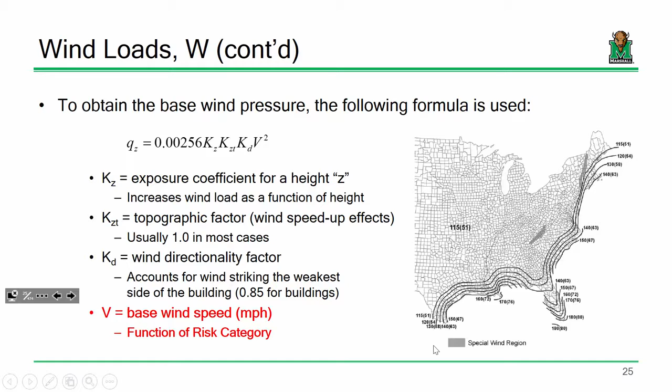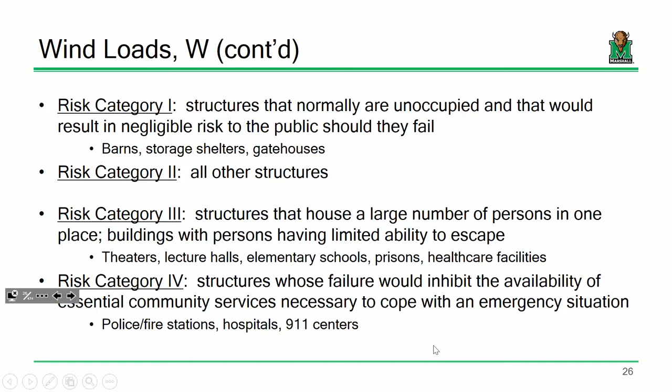We talked about risk categories. Risk categories affect seismic design as well, although we're going to kind of soften it a little bit. Just like wind, designing for earthquakes is going to be dependent on the type of structure you're designing. You're going to approach seismic design differently for a 911 call center than for, say, a barn or a grain silo, because it's all about risks. There's more potential danger with the failure of a 911 call center than there would be for some barn or something.

Now, Kz, like I said, that's the complicated one, that's the one we went through last time. I say it's complicated, but it really is pretty plug and chug, you just go through and calculate it out depending on the height of your structure. The idea is, if you have a really short structure less than 15 feet tall, we can just keep it simple and assume a constant wind pressure. For anything over 15 feet tall, that's where we need to start assessing wind speed or varying wind pressures as a function of building height.

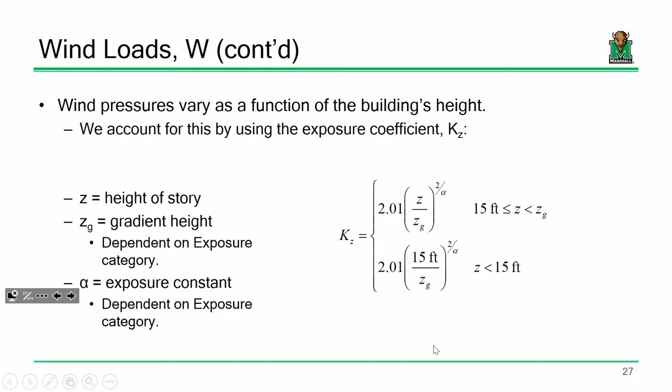And these equations are valid up until Z sub G, this gradient height, which is dependent upon the exposure category. But keep in mind that's pretty tall. Category B, that model would be valid up until a height of 1,200 feet, a pretty tall building. All right, does this sound good? Any questions? Yes?

That's when you start breaking out. That's a good question: what do you do if you're in excess of this? That's when you start doing things that are a whole heck of a lot more refined. It wouldn't be off the wall to do something like a wind tunnel test, build a scale model of the structure and actually put it in a wind tunnel and start recording the response.

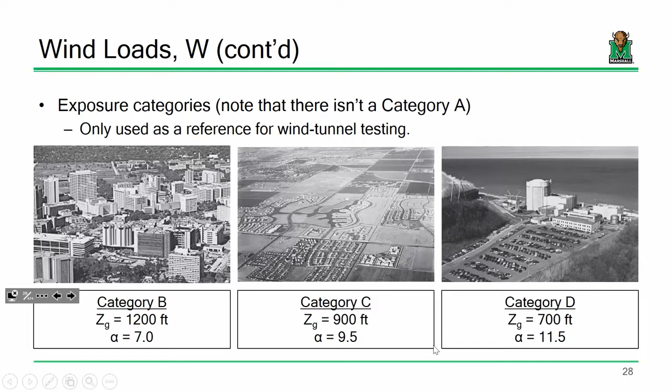That's pretty common for your really complicated structures. That's one way of going about it. Another way is to do some more refined computer modeling and things like that. Sound good? Okay.

So we went and did a pretty basic example to try and assess how you would compute base wind pressures at varying heights of the building. What you would then do with those pressures is similar to what we did in concrete design, regardless if you had it last year or 2 days ago: take that wind pressure and distribute it across the element's tributary area to determine what point load I need to put on my RISA model. We're going to do something somewhat similar today with seismic.

Last thing I did want to mention, we're not doing everything associated with wind here. There are some other issues, like handling gusts and internal positive and negative pressures in a building under wind. We talked last time, if you're in a building and it's really windy outside, you've experienced that event where you open the door and it has a tendency to either slam shut or stay open under heavy wind. That's because you can generate positive and negative internal pressures inside a building, and sometimes you need to take that into account when you assess the frame.

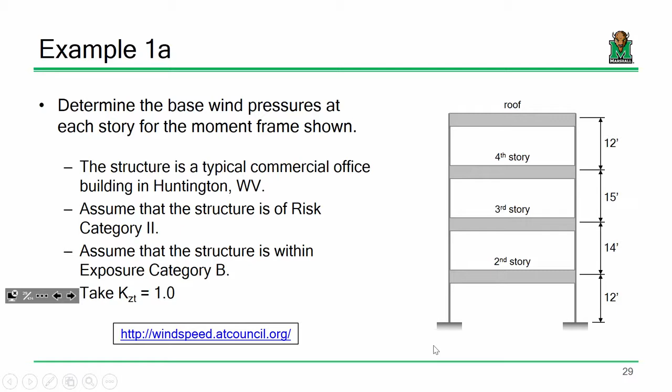Okay, so like I said, a couple other things. Again, the internal positive and negative pressures. Also, eccentricity.

More often than not, we engineers would like to deal with buildings that are nice and rectangular and symmetric and easy to analyze. But what if we have a building that's something like an L shape and we have wind attack it? Well, not only is that wind going to be applied to the frame, but it's probably going to want to take the building and twist it a little bit. So it's not very complicated to assess.

We can talk about it later when we go through some assignments, but the long and short of it is when you have a frame like that, usually you're going to take your wind and offset it some amount. So you'll have a larger wind pressure on this side of the building than on this side to account for accidental eccentricity and things like that. If you can handle base wind pressure, then it's really just more provisions and pretty straightforward stuff.

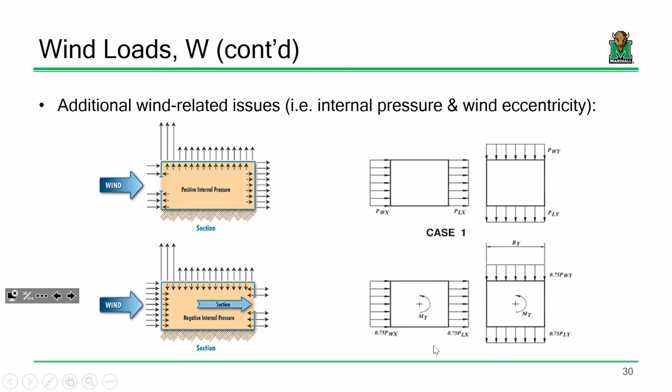All right, let's talk a little bit about seismic. Let's try and get through that today. So like wind, seismic is a fairly significant lateral event that we have to assess for building structures. It's pretty straightforward if you understand the procedure.

The long and short of it is this: it goes back to the basic analogy of if you're sitting in a car seat driving down the road and the driver hits the brakes, you fling forward. You fling forward because your body, i.e. your hips, don't have the lateral stability to hold you back during that sudden change in acceleration. Now, to arrest that motion, we place a system inside the car to hold you back, we call that system a seat belt. So that seat belt experiences a force applied to it, and you would calculate that force by saying your body's mass undergoing a given acceleration: force equals mass times acceleration, right?

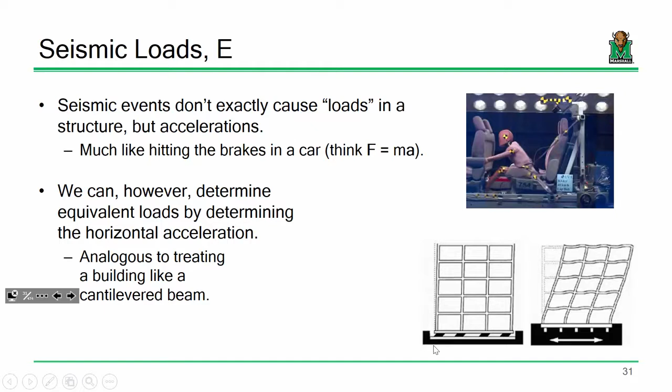Same thing's true in a building. Now, the step-by-step process is a little more involved, but in the end it is fairly plug and chug. The first thing you would do is determine the seismic response spectrum, and we're actually going to do that today, but it's pretty simple. It's all about determining, based on your soil conditions and where you're at in the United States, a different set of acceleration characteristics. We'd have different characteristics here in Huntington than we would in, say, Los Angeles or somewhere like that.

The next thing we have to do is determine the building's period of vibration, and we'll talk about what that means later, but it's a fairly plug-and-chug expression. Based on that, we would determine the seismic response coefficient, and this is basically just how many Gs the building is that we should be designing the building for during an earthquake.

So you've probably heard the expression under acceleration, like fighter pilots hitting so many Gs. Well, if I were to take a building and literally pick it up and have it be subjected to its own self-weight laterally, that would be the building being subjected to 1G, just gravity.

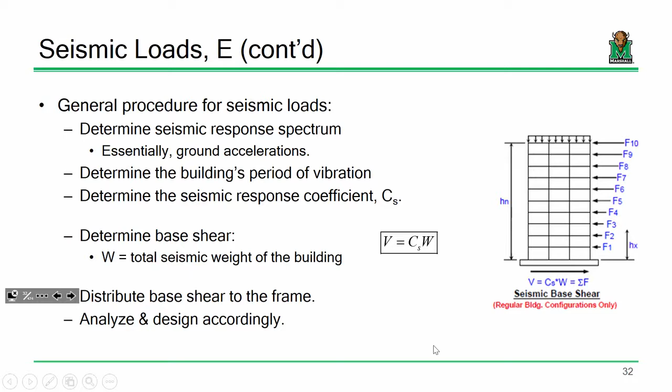Once we determine how many Gs the building is responsible for, basically all we do is take that total base shear and distribute it: how much goes on this story, how much goes on this story, etc. It's a pretty plug and chug expression. We talked about this last time, so I don't want to illustrate it again.

This is just another one of those maps that highlights different effects across the country. For this one, we're looking at earthquake hazard levels. Depending on where you're at, this can be tough to determine, so we're going to use a similar online design tool to help determine our accelerations.

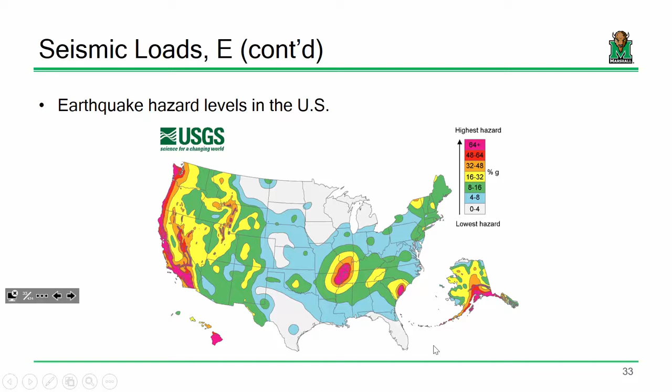What I want to do is look at determining the seismic response spectrum for a typical building here in Huntington. So just like last time, we're going to look up latitude and longitude for this region, and use this to help determine our response spectrum.

Our response spectrum is going to look something like this. This response spectrum is defined based on a given set of points, like design spectral accelerations at short periods and at long periods, etc. I don't want to get too much into earthquake engineering, but the long and short of it is this.

This will tell us, in a nutshell, how many Gs we should be designing the building for as a function of the building's period of vibration. So once we determine this, we can determine the period of vibration, and that'll tell us how many Gs we have to design the building for.

For this calculation, we're going to assume risk category 2, and we're going to assume that stiff soil is found at the site. You'll see what that means in a second. Now, everybody good so far?

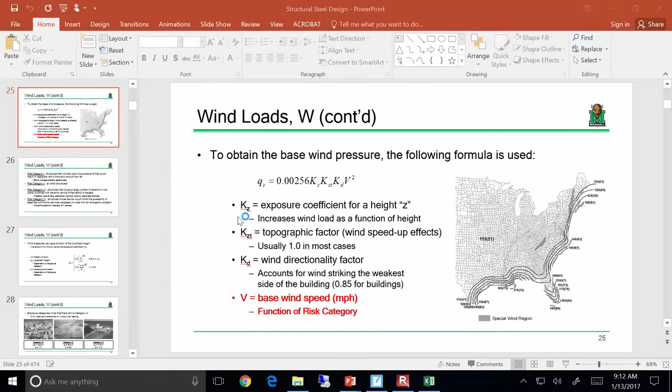The nice thing is there's a nice online tool we can use, at USGS's website. I don't want to use Internet Explorer, we're going to copy that and put it into Chrome. Okay, Chrome's taking its time.

This is a tool that will tell us the ground accelerations we need to be using for design, depending upon where we're at in the United States.

The first thing we have to do is select the document we're going to use. Are we going to use NEHRP? Are we going to use the International Building Code? For us, we're going to use ASCE 7 — remember, that's the document we use to obtain our loads. If you look here, see where it says 2010 ASCE 7? That's the one we're going to go off of.

Now, report title — I don't know, we can call this example 1B. Is that what we're on? Okay, all right, 1B.

Site soil classification: depending on the soil characteristics at your site, you're going to have different ground conditions that the building is ultimately responsible for. The default value would be site class D, pretty typical soil conditions for your site. But this is where the geotech engineer would come in and say, here's the soil conditions you need to use for design. We'll go ahead and use site class D.

Now we need a risk category. Pop quiz: if I've got a commercial office building, what risk category should I be using? 2, there we go. So we have either anywhere between 1, 2, and 3, or risk category 4, so we'll use this one.

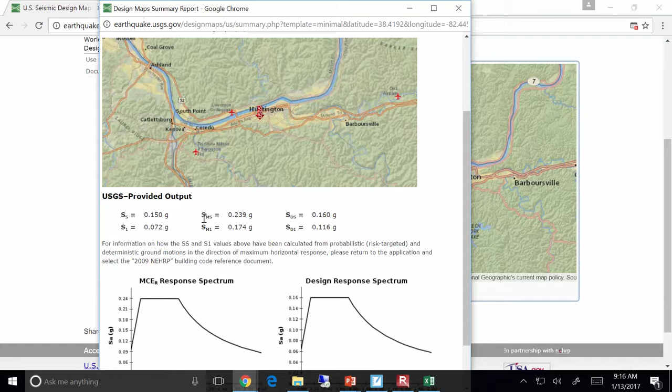Now the MS and the M1, those are the accelerations that have been modified based on the soil conditions that we provided. We'd get different modifications for site class B than for E, et cetera. And the DS and the D1 are the design accelerations, those are the ones we would actually use for design. The nice thing is a lot of this is procedurally generated for us, so we really don't have to worry about it. If you want, you can view a detailed report, and it goes a little more into, based on this soil condition, this is the value we looked up from this table, et cetera.

This is a really nifty tool. I think just about any structural engineer designing in earthquake zones uses this quite a bit. But all in all, really what we're interested in from a design aspect is this. From a design standpoint, this building would be subject to about 0.16 Gs or 0.11 to 0.12 Gs, depending upon the building's period of vibration. Which, I mean, we're in Huntington, West Virginia. We're not in LA, see what I mean?

Let's play around with this. Let's see what would happen if we were in LA. Let's just try that out.

California. You don't want to hear me sing. You really don't. Okay, all right.

So look right here, a lot different, right? We're looking at 1.6 Gs or 0.85 Gs. Well, it's because it's Los Angeles, that's an earthquake zone. Yes, sir.

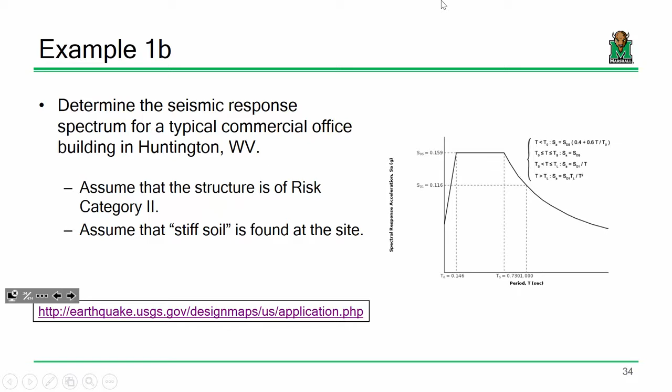In a nutshell, this is how many G's the building is responsible for as a function of the building's period. So what is the building's period?

Well, one of the fundamental principles of not just structural engineering, but this is really just more physics in general, is that under free vibration, any structure will vibrate according to what's called its natural frequency.

This is one of the reasons why a lot of musical instruments like guitars or pianos tend to work. Imagine I have a classical piano right in front of me, not an electric one, but the ones with the strings in the back.

Now, let's say I take a particular key and I do one of two things: I play it really lightly, or I mash on it. What's the difference between playing the key really lightly and hitting it really hard? I get a louder sound, right?

But does the note change, or is it still a C sharp? It's still the same note.

What happens in the piano is that once you hit that string and that hammer strikes the string, after that, the string is vibrating on its own. It's vibrating according to a certain frequency, its natural frequency. So many cycles of vibration per second, so many hertz.

Doesn't matter if I hit the string very softly or with a lot of force. In the end, it's the same frequency. The same thing is true in guitars or anything like that, and the same thing is true as well in buildings.

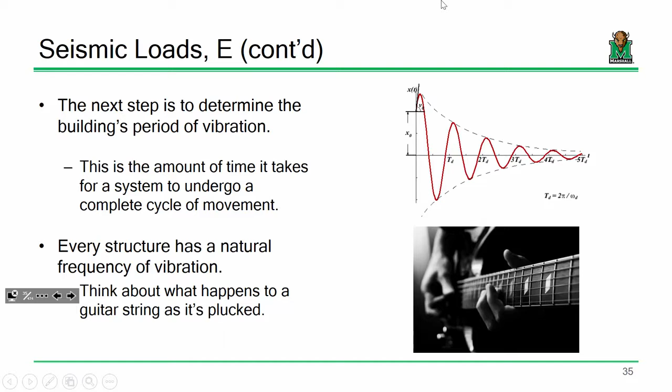It is not an easy thing to compute. There's a lot of diff-EQ, a lot of math, a lot of matrix analysis, all geared around that particular science. Luckily for the regular old design engineer, there are some very basic

models that we can use to compute what's called the building's period. The building's period is just how long it takes for the building to go through a given cycle. So here's the building, it vibrates and comes back - however long that cycle of vibration takes, that's the building's period of vibration.

Sound reasonable? So there's a very nice plug and chug expression that we can use, and this just comes from doing a lot of analysis and data assessment on brace frames, moment frames, et cetera.

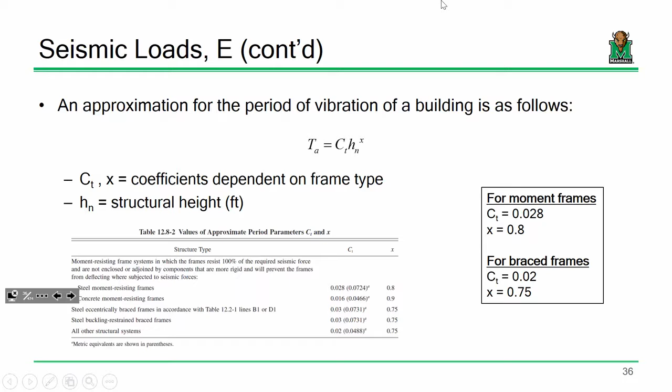Now, once you determine the building's period of vibration and you've got that seismic response spectra, you can then determine how many G's the building is responsible for, and that's this constant C sub S.

I'm soft pedaling this a little bit, I'll be honest, because there's a little bit of math that goes into C sub S, but primarily it's a function of that response spectrum that we looked up earlier using the USGS website. It's going to be a function, obviously, of the building's period and where it's at.

It's going to be a function of the building's risk category, whether or not it's risk category 3 or 4, or what have you. But the one I'm soft pedaling a little bit, because I don't want to inundate you with too many details, is how much yielding is tolerated. Depending upon where the structure is, like I said, sometimes we can hit some really crazy G's.

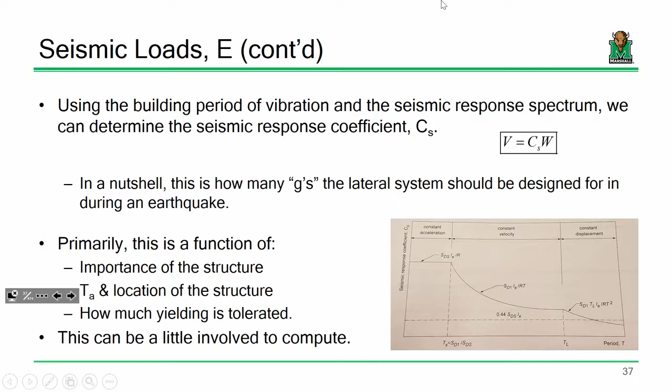I remember how I was saying there's all sorts of unique systems whose sole purpose is to fail during earthquakes. Depending upon the different type of system you're using, you have different response characteristics that you'd use to determine C sub S. So I am soft pedaling that a little bit, but I just wanted to give you a general understanding of where that comes from.

Ultimately, what I'm interested in is that given a C sub S value, you could then take the weight of that building and determine how much force needs to be applied to each story. I know the equation looks really complicated, but it's actually really simple. This is just a distribution factor that'll tell you, based on that base shear, put 20% on this story, or 30% on this story, or 15% on that story. We're going to go through a really basic example on how to do this, and I think you'll see it's pretty straightforward.

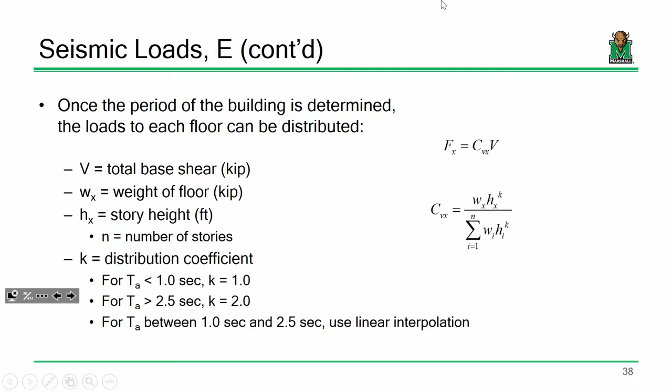The only thing worth mentioning is this distribution coefficient. If the period of your building is less than 1 second, we take this value to equal 1. If it's larger than 2.5 seconds, we take it to equal 2. Anywhere in between, we would use linear interpolation, and that's basically it. If the details are a little fuzzy, don't worry, I think this example will clear it up quite a lot.

That and the geometry of the building - the weight of the second story here is going to be different than the weight of the second story over in Smith, right? It's a different building altogether. Just like if you're building a library - if you look at the floor system over in Drinko, that sucker is stout, it's not going anywhere. But that's actually a concrete design topic, and we'll talk about that later.

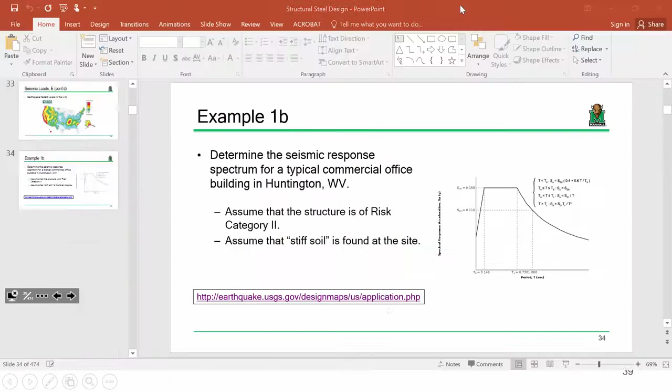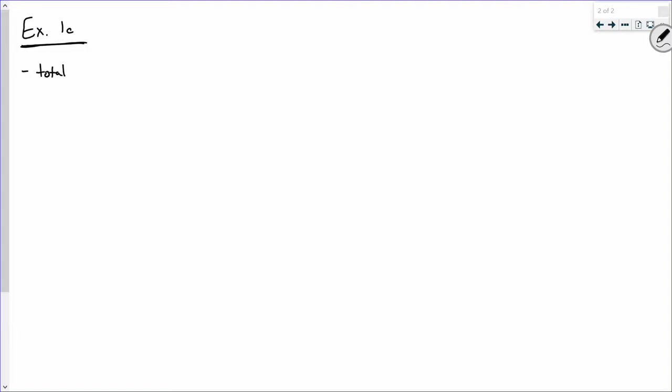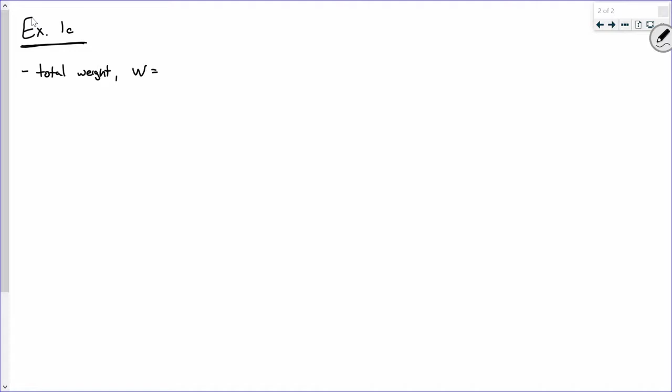Now, help me out with something - we'll call this example 1C. What's the total weight? Somebody said, I heard 700 and 800. 800, all right, 800 kips. So to give you an idea of what we're doing, here's the long and short of it - the total weight of the building is 800 kips.

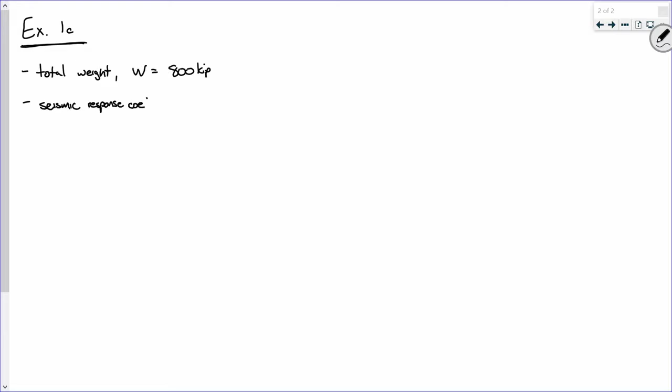Now, our seismic response coefficient C sub S is 0.1 - that's more realistic, that's more expected of what we would get around here. So with C sub S at 0.1, this means the total base shear V is 0.1 times 800 kips, which is 80 kips. If you're wondering what total base shear is, basically that's saying under an earthquake, that's how much lateral force the whole building is being subjected to. What we need to determine is how much of that force needs to go to each story. Sound good?

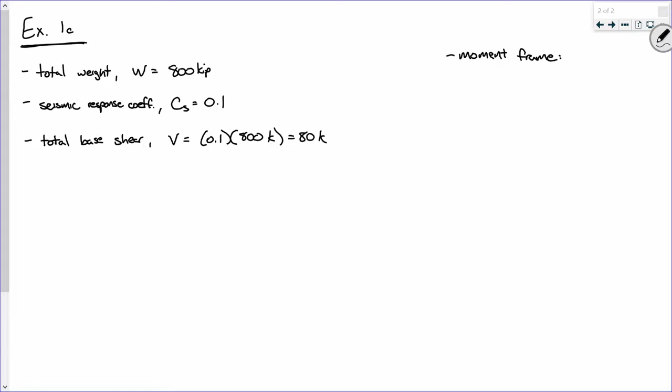Now, over here on the side, we're dealing with a moment frame. So help me out with this moment frame - if it's a moment frame, answer me two things: what is C sub t and what is x? 0.028, and x is... Now, h sub n is the total height of the building from the ground - so how tall is the building, essentially?

53 feet? Anybody else getting that?

Okay, all right. What that tells us is we can determine the approximate period of the building. So that's CT HN to the x, which is 0.028, 53 feet raised to the 0.8. Now I know the units are going to be a little crazy. Ultimately, whatever answer we get is going to be in seconds.

You should get a fairly low value.

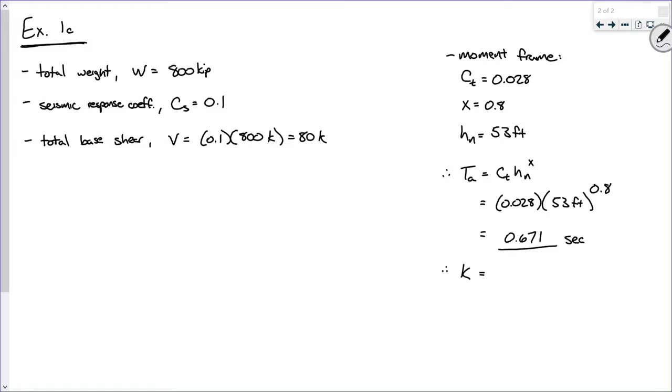Now, where we use this value, actually I know it might seem a little insignificant, but we use this value to determine K. And what is K going to be if this is our building period? You'll find that in that distribution table. Let me pull that up just to make sure everybody's clear about that.

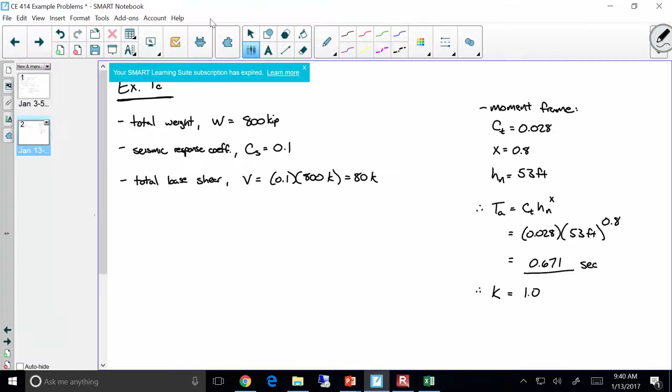Okay, now using this formula, I know it looks funky, but it's actually really simple. And the easiest way to go about it is to set this up in a table. So I'm going to set this up down here. And don't worry, I posted an Excel sheet that goes through a lot of this, so if you've got any issues, I think you'll find it's pretty straightforward.

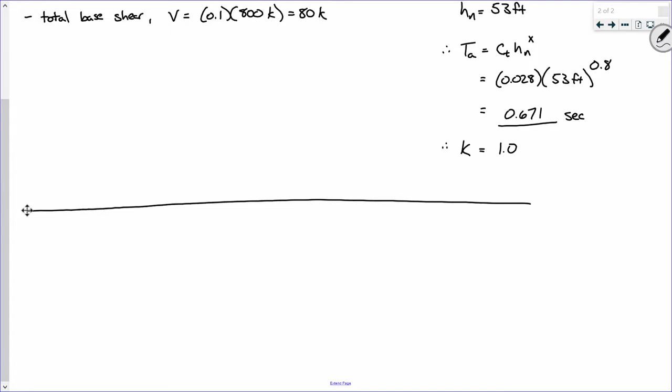Now, help me out with this. So the first thing we're going to list is W sub X. Now, what that is, is just the weight of each story. So what's the weight of the roof, the 4th floor, the 3rd floor, and the 2nd floor? 250. Simple, right?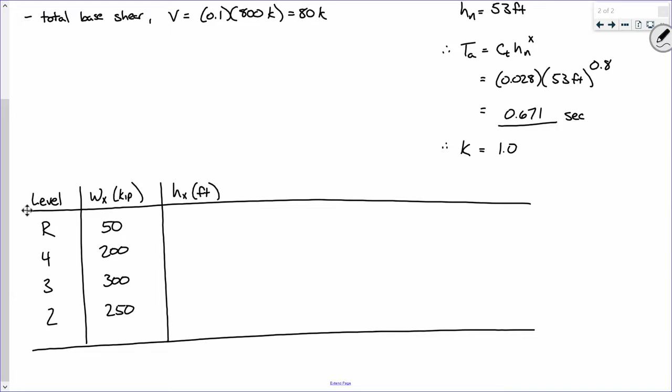Now, the next thing we're going to list is H sub X, and that's just the height of each story. So if you want, it might be easier to actually start at the bottom. So how far is it from the ground to the 2nd story? 12. How far is it from the ground to the 3rd story?

No. From there you go. There you go, yeah, 26. So the next one is 41. And then the last one is 53. That's a check because that's how tall the building is, right? So this is where being careful in your documentation can matter.

Now, what I'm going to compute is this: WH raised to the K, okay? So it's just the H raised to the K, and then multiply that times W. But the nice thing is K is 1, so anything raised to the first is itself. So all in all, we're going to do is what's 50 times 53?

There we go. What is the next one? That's going to be what? 8,200? Next one's going to be something about like, what, 7,800? And then 3,000.

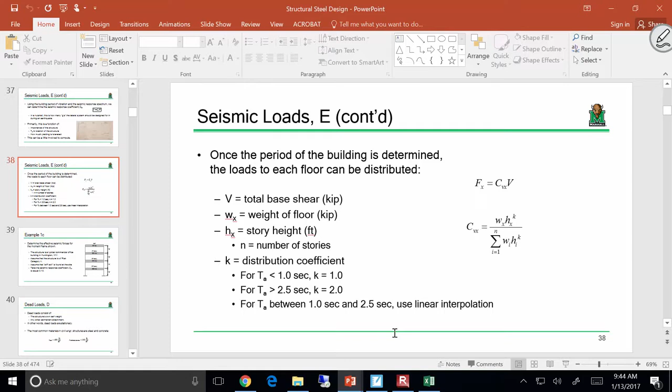So to determine the first one, I'll pull that up here. We'll put in a column for CVX. Not the pharmacy—CVX, I know, that's what I'm saying.

So to determine the first one, all we would do is take 2650 and divide it by the sum of all this. So what's 2650 divided by that? 0.122. And the next one, and the next two I'll go ahead and tell you are 0.36 and 0.139.

The only thing you have to do to determine the force is to just take CVX times V. In other words, what is the base shear that the entire building is responsible for? Anybody remember? It's on the screen—80, right? So this much of 80, this much of 80, this much of 80, and this much of 80 goes to each story, and that's it.

Yes, sir? Is this like a fancy weighted average? Basically, that's all it is. It's a fancy weighted average.

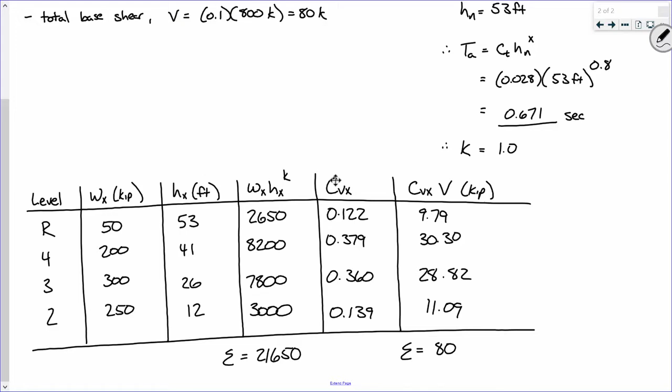You believe me? I appreciate that. All right, any questions?

So that you understand the meaning of these values, literally what I would do is break out the RISA analysis, and I would say, okay, here's my frame. I would go in and put the joints and the boundary conditions, and then I would just say, okay, up here put 9.79, here put 30.3, and et cetera, and then there you go.

That would be my seismic analysis. All right? Sound good? Any questions?

Does directionality matter? Direction—no, because that's a good question, and no, because it can go either way. But that's assuming that you're building symmetrical. You're also getting other issues as well. It's similar to what was going on with wind. Under an earthquake, the building might not just want to go this way; it might want to rotate, just because of its plan profile.

And this is kind of what you were mentioning after class earlier—you had also mentioned the Taipei 101, basically that big tuned mass damper. It's just a big mass that's trying to keep it centered during an earthquake. So yeah, all right, everybody good?

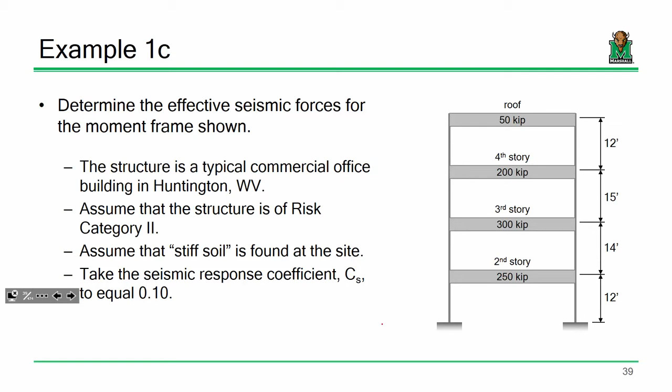Okay, I'm going to go through this really quickly because if you've had concrete design already, you've seen this stuff before, and if you haven't, we're going to talk about this in about 10 minutes. But I did want to at least briefly mention some of this for folks who haven't had concrete design in a while.

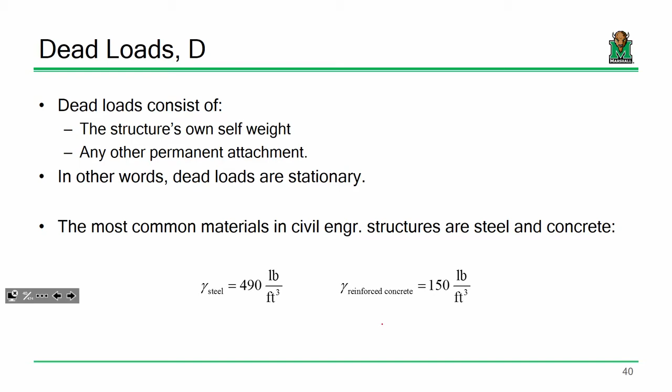So first off, dead loads. I think everybody who's had concrete design ought to remember that—it's basically the self-weight. Remember, the two unit weights I want drilled into your head are the unit weight of steel and the unit weight of reinforced concrete. I know my folks who've already had concrete design know that's burned into your memory by now. Anything else, you can look up.

You all remember that, don't you? Yeah, I know you do.

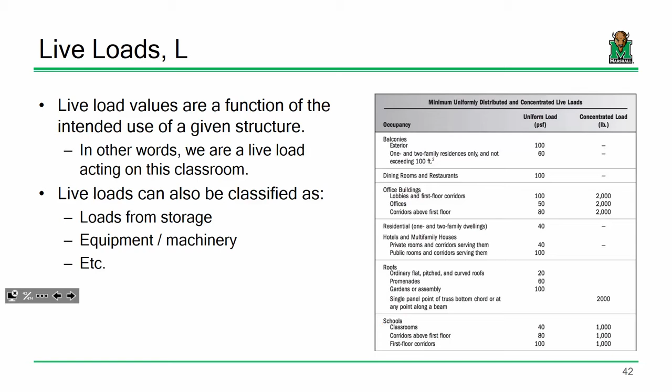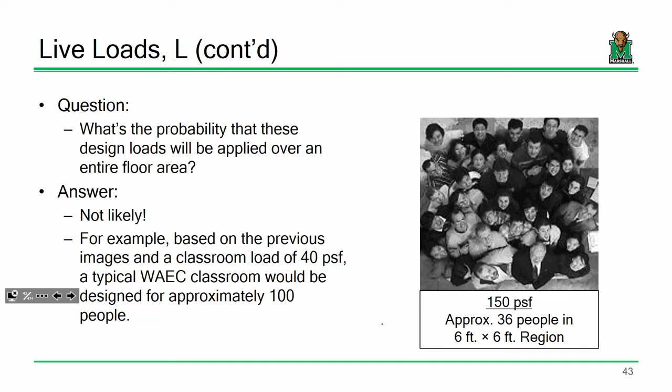We're going to talk about this in concrete design next time, but live loads also depend on the type of structure you're assessing—whether you're looking at a library, a school, or an office building. You have different live loads, but I know my concrete folks also remember live load reduction, right? I'll soft pedal that for now since we'll talk about it in detail later. The question is, do you have to design for the entire maximum live load in most cases? The answer is no, and that's where live load reduction comes into play. I know my concrete folks remember that.

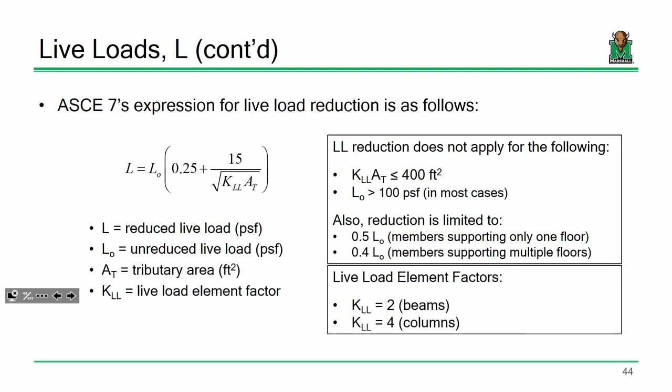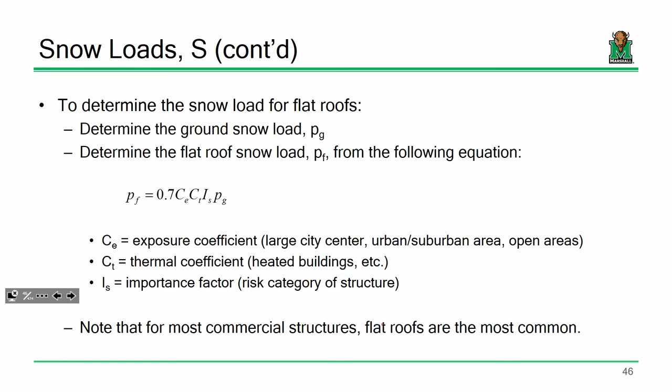Lastly, snow. We didn't use that in significant detail in concrete design before, and we're not going to do that much this year either—we'll just sort of discuss it in the next class. The long and short of it is snow loads are a function of where you're at. That's basically it in terms of loads for steel design. For concrete design, we'll talk about some of this stuff in a little bit.